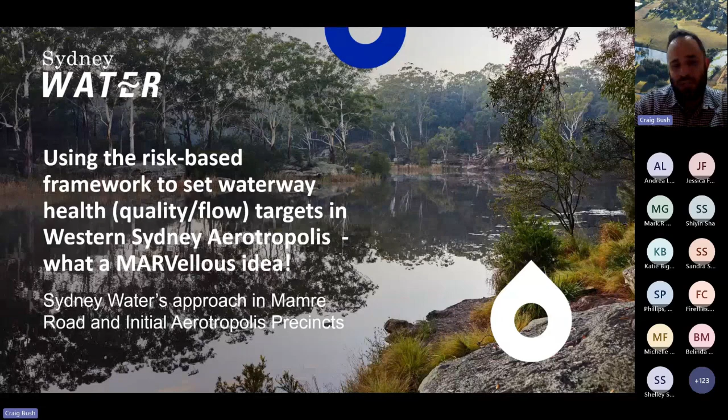G'day everyone, thanks for the introduction. My name is Craig Bush. As indicated, I work for Sydney Water as the acting Wianamatta Stormwater Lead and looking at Mamre Road. So today I'll be talking about how New South Wales and Sydney Water have used this risk-based framework to set the waterway health targets within the new Western Sydney Aerotropolis precinct.

I would also like to acknowledge the custodians of the land and water, and for me it's the Dharug people in Western Sydney. A quick overview of what I'll be talking about today will be the Wianamatta catchment and the Aerotropolis precincts, and what some of the drivers are that have been undertaken to get us to where we are.

What makes this project quite different to some of the others within Western Sydney and New South Wales? What's our integrated water cycle management approach, and the status and way forward from this point?

So a little bit of background. The Wianamatta, or South Creek, is in Western Sydney. It's quite a large catchment, and its actual name in Dharug means mother's place.

It's 80 kilometres long, 62,000 hectares in size, across 6 different council areas. It is transitioning from a farmland or peri-urban landscape into more urban and industrial development. There is already some development within those precincts, but they'll be intensifying in nature going forward as well. So it's a changing place.

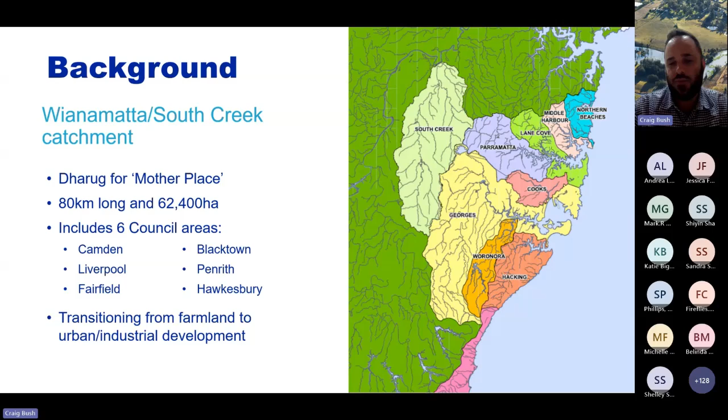In regards to the precinct we're talking about today, the Western Sydney Aerotropolis, this shows a bit of a scale of what it looks like compared to Sydney. It basically runs from the Harbour Bridge or Opera House all the way to the airport, going north-south, and it's quite a sizable area in that context.

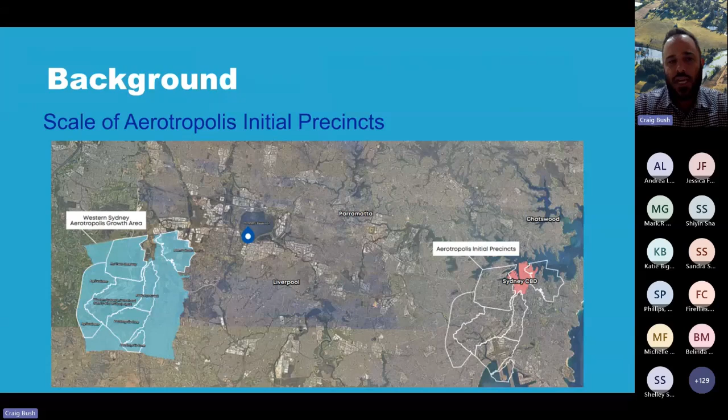A little bit more about the background. Some of the constraints, because it's surrounding an airport and there's noise restrictions, the predominant zoning will be industrial. There are some pockets of residential and mixed use, but predominantly industrial, meaning quite large format buildings that take up a lot of space and produce a lot of stormwater.

Another potential constraint is the airport requirements - they're quite strict around bird strike and minimising habitat for birds. This is difficult in our response because we're building large ponds, which I'll get into later. Also, the Aerotropolis precinct is across multiple council areas, so we need good relationships going forward with that.

But the opportunities are, obviously, it's quite large, the precinct, and the amount of development that's occurring, so it's great to get all that planning done in one go, or as succinctly as possible. The New South Wales government's been great in supporting the waterway health targets and making sure they're set in the DCP and the SEPP, which I'll talk about a bit later.

And obviously, integrated water cycle management, as we probably already know, its effectiveness is great when it's at a larger scale in terms of costs and implementation. As part of this precinct, there's obviously great emphasis on the landscape being landscape-led, and designing with country has been incorporated into those statutory requirements.

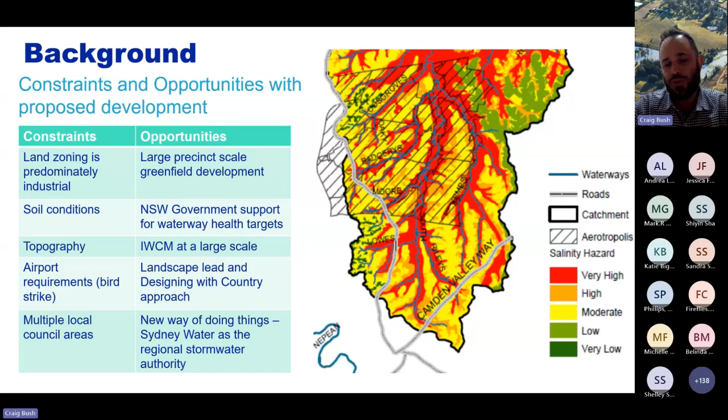And Sydney Water, as mentioned previously, this is the first time at this sort of scale to be looked at as the regional stormwater authority, where we're looking at both the conveyance of stormwater, but also the water quality and reducing flows.

So the drivers for WSUD. The Aerotropolis precinct is quite big to facilitate the airport, and there's going to be some logistic hubs as well within this space, so the most development is in this industrial commercial space.

But there is a bit of a mix within the Aerotropolis, looking at the environmental, which is mainly the riparian corridors. There are some pockets of residential, and agriculture is also being proposed. However, initially, from what we've seen, that's also looking to be somewhat industrial zoning as well, with large format warehouses being proposed. So that is a bit of a constraint we need to consider as we move forward in that process.

The initial precinct is around 7,500 hectares, but there are some future areas coming on board later down the track, which add up to close to 3,500 hectares.

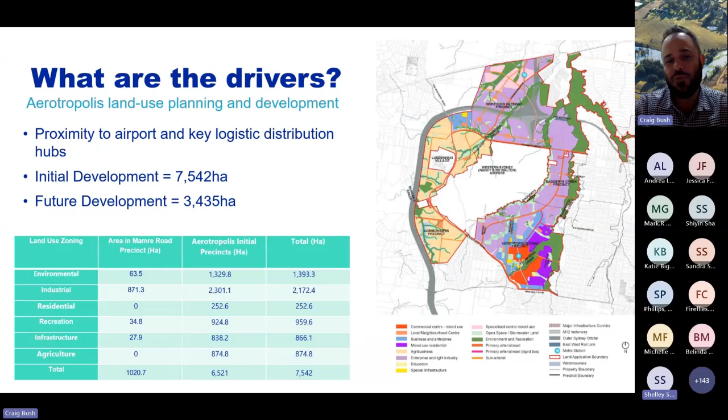So the next driver is the existing environment that's out there. There's some threatened species such as the Cumberland Plain woodland community and the river flat forest, and there's been work to look at which areas we should be protecting and improving to provide a better environment going forward.

And then obviously the Wianamatta South Creek is identified as having high ecological value waterways and water dependent ecosystems, so we need to be wary of how we protect and move forward on that, some of which are sensitive to both pollutants and the flow that's generated, and also the fish habitat.

Sydney Water has also been working with, I think it's Western Sydney University, looking at doing some platypus surveys, and we have found the eDNA in a couple of samples, but we're still yet to actually trap one of the platypus for research purposes to see how it's going. So there is a bit of work happening in that space.

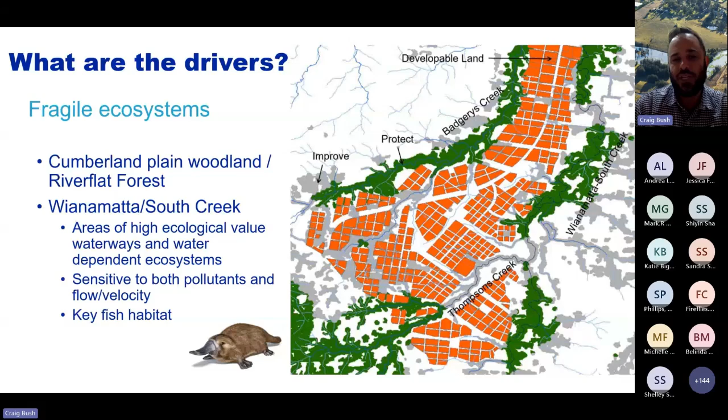Now when you're looking at the policies and strategies, there's a whole raft of them looking at this precinct and Western Sydney in general, so they all play an important part in what drives waterway health protection and the implementation of WSUD. Just looking at the main ones, there's the SEPP, which is the highest level looking down. It provides clear indication that WSUD should be incorporated as part of the development to protect the riparian, stormwater and flooding measures, and it should be integrated.

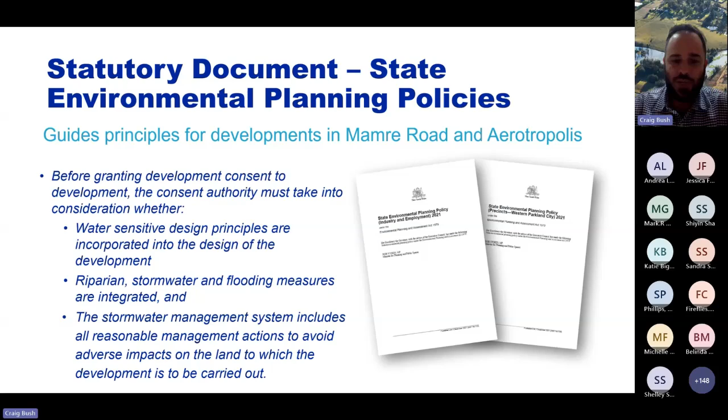And the stormwater management system includes all the reasonable measures to avoid adverse impacts. Then the next level down, which is the DCP, again is quite strong in that it's there to protect, maintain and restore the Wianamatta South Creek and its tributaries from managing the impacts from development, looking at the conveyance of stormwater, and also life cycle, maintenance and effective management of stormwater going forward using WSUD.

So what makes this project different? Obviously within New South Wales we generally look at the fairly standard BAU approach, which is the 85, 65, 45 pollutant reduction targets. But there's been a body of evidence indicating that might not necessarily provide the ecological benefit going forward to protect the waterways, and that we need to be looking at more of a site-specific or waterway-specific approach to identify what we should be looking to protect and how we go about doing that.

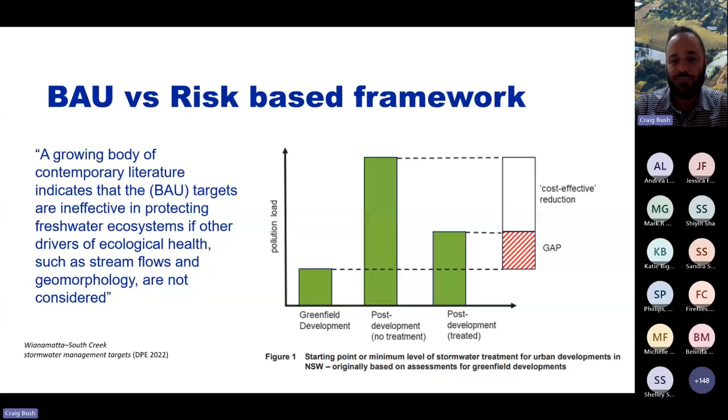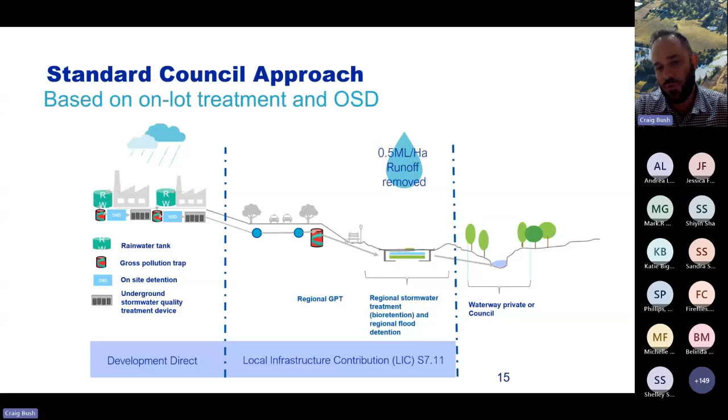So this is an example of what the existing BAU process may look like for an industrial development, where you may have a rainwater tank to meet 80% non-potable water demand, on-site detention and water quality treatment on-site, or potentially on a regional scale. The stormwater generated from those developments and from the streetscape goes into a regional basin where it gets treated to meet those targets, but then the majority of those flows go into the waterway. Very minimal is actually reduced in that approach.

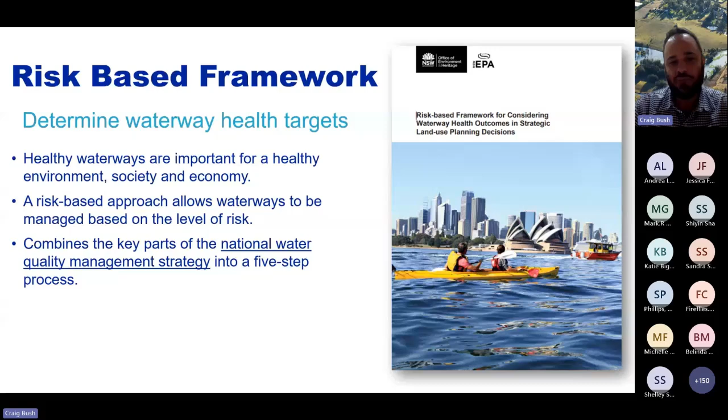But then once state government was looking to create the frameworks around South Creek and Wianamatta, they used this risk-based framework, which is a great document and a great way of looking at how we determine waterway health targets going forward, looking at multiple important components such as the environment, social and economy. It also leans on that national water quality management strategy, which is a five-step process.

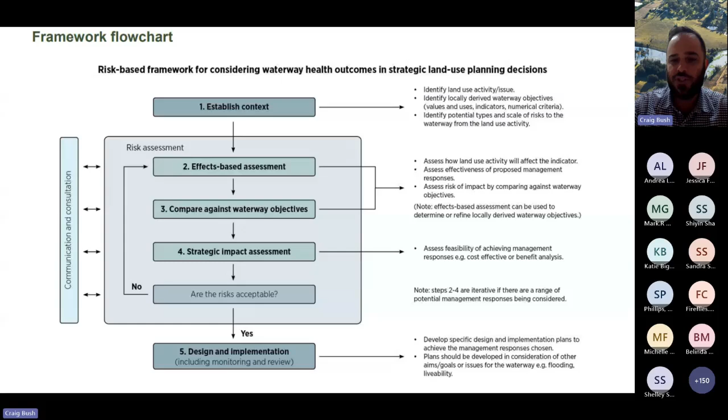I'm not going to go into it in detail, but basically you identify the context, you identify some of the issues and how those impact the objectives. You come up with, and might need to look at, the approach, and then how that can be fed back into a cost-benefit analysis. And if it all works acceptably, then you move through into design and implementation.

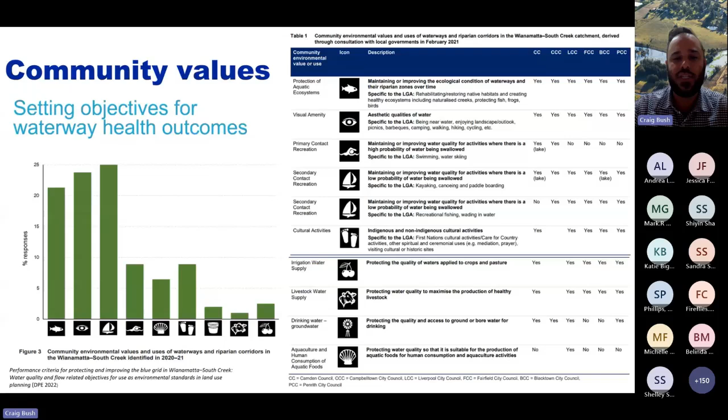With the Wianamatta South Creek catchment, they looked at the community values, a lot of which are focused around that ecological health and some of the secondary contact. There was also some values being placed on primary production and aquaculture going forward, because the Hawkesbury Nepean does have oysters and other key industries in that space, so protecting them is of great value.

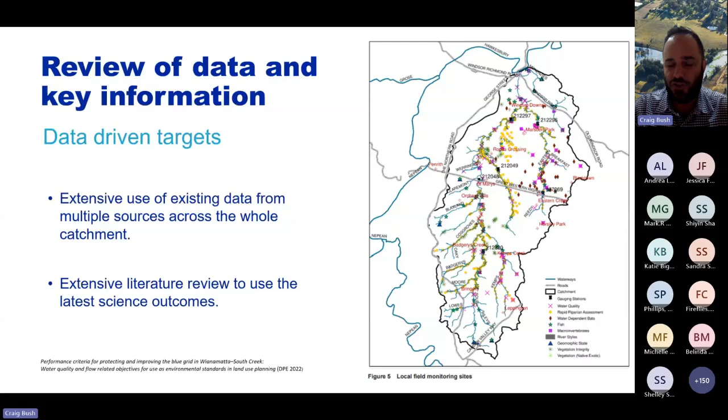As part of that process, there was a lot of data collected within this whole catchment to look at the waterway health and the existing environment, to work backwards and say, well, how do we need to protect it and what are the ways in which we need to go through for that? Also, obviously, looking at extensive literature that's been developed Australia-wide and globally.

And the outcome was that they set up these waterway health targets based on that data, but also determining through the creation of tipping points at what point does that create a negative impact that's irreversible. So how do we avoid that and work out the targets based on protecting that and reducing that impact going forward?

So how's that sort of related back into the DCP, the Development Control Plan requirements for water quality? I've included the standard council 90, 85, 65, 45 reductions, but the Wianamatta targets are a little bit higher for water quality, so it's 90, 85, 65. There's also a second option which is looking at what is the actual allowable mean load.

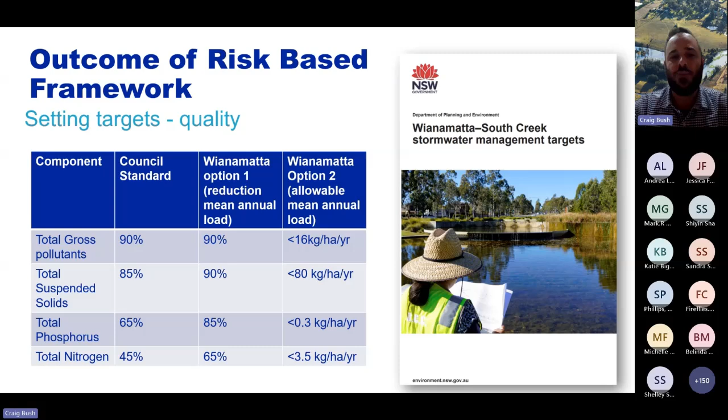So there's two options. You can just do the basic load reduction, or you can work out specifically the amount that's being reduced depending on the type of development, and I think that's mainly for existing development where you're making modifications.

But the big one that's different is that we have a set target looking at flow, which comes from the MARV idea, the mean annual runoff volume. The target being, generically speaking, less than 2 megalitres per hectare per year. Industrial development from our modelling normally lands somewhere between 5 and 6 megalitres a year, so there's a significant reduction in the amount of flow within the waterways to protect them and provide that buffer to make sure we're not getting past the tipping point.

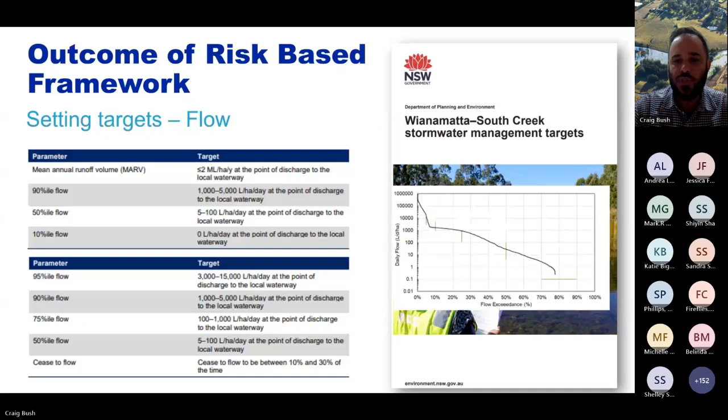Okay, so our approach, similar to what we showed before with the BAU, is that there's still some on-lot controls, mainly the pervious fractions, so landscaped areas. There's still a gross pollutant trap, and still on-site detention, but there will be irrigation of those landscaped areas. One of the main differences is we have the inclusion of passively irrigated street trees within the streetscape.

That's a council requirement, or Transport for New South Wales, depending on the type of road, and they're there to be integrated to take some of those flows from our roads to reduce the volume that ends up getting into our regional system.

We've also got natural trunk drainage channels which convey the water to those end of pipe systems and contain that 1%, and the regional approach being that we treat the water to those standards, have large ponds that then provide water back to a recycled water system that's fed back to the precincts to be used for non-potable water demands, such as toilet flushing and irrigation.

And we've also got a backup from the Advanced Water Recycling Centre, the AWRC, which can provide water for when we're going through drought and there isn't any stormwater to harvest.

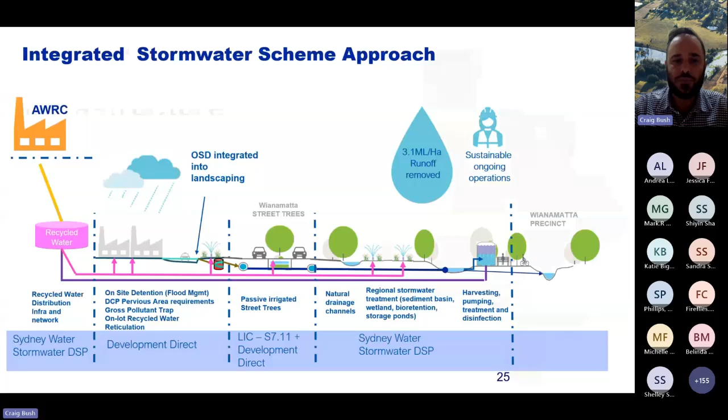So within the scheme, the precincts at the moment, Mamre Road is the first precinct that's going ahead, and we've done some scheme planning as part of that process, shown in this image. Basically it shows our trunk drainage channels and the basins, which are generally on the edge of the precincts. There's roughly 11 kilometres of trunk drainage and 24 basins, which equate to about 65 hectares. So at a regional approach, this is what we need to meet those targets going forward.

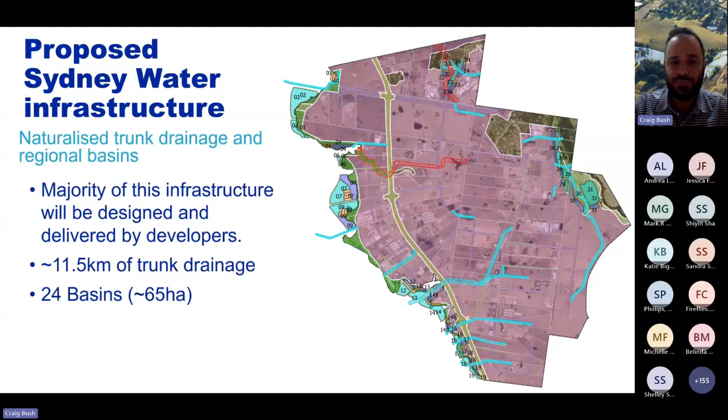Our trunk drainage channels, being a naturalised system, have a low flow channel, and convey that 1%, which is quite important, generally between 20 to 40 metres wide. Sydney Water may not necessarily own the asset, but control it via an easement. It's also quite important in that it provides irrigation water going forward.

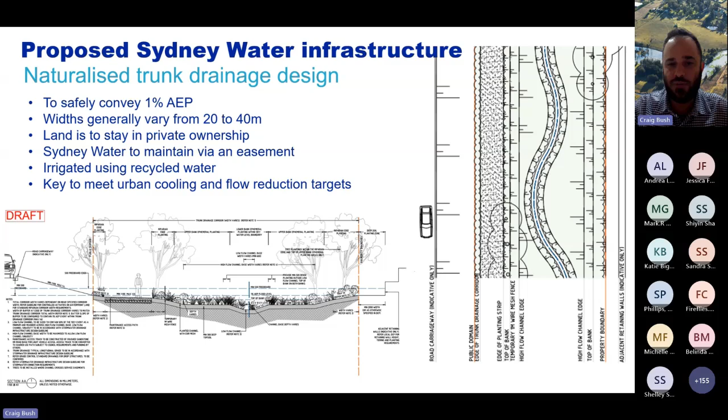So we're helping to achieve the targets through the irrigation of these areas going forward, along with the private development. It's also a key part of making sure these development areas are cool, providing vegetation and cooling through the irrigation, as well as reducing those flows.

Then our regional basins, which again form part of the treatment required to meet the targets, generally consist of a sediment basin being online or offline, wetland and bioretention systems that are coupled. So it means that the wetland, as it fills up, will drain through the bioretention system before it gets into the pond. They share an EDD, so it makes the bioretention work a little bit harder to meet those targets.

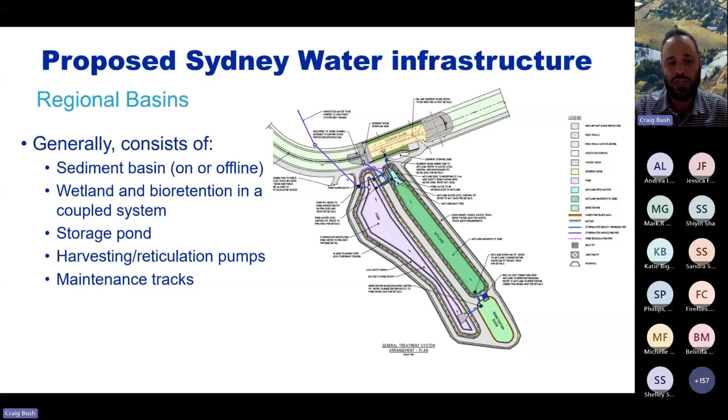And then the storage pond is sized to meet those demands for the recycled water, so they are quite large. Obviously, as part of that, we've got harvesting, reticulation systems, end of pipe treatment—screen filters, chlorination, UV, all the rest of it—and then maintenance tracks to make sure we can maintain these assets going forward.

Once the water gets into the recycled water system, there's a distribution network that follows the road alignments so that all developments have access to this recycled water for their non-potable demands going forward. Generally, harvested stormwater is the priority use, then treated wastewater, with potable water as the last resort.

So, current status and ways to move forward. For Mamre Road, we're the authority, declared in March '22. We've created some scheme plans that have evolved over time, now up to the third scheme plan. We've got some initial indicative approval from Infrastructure New South Wales as part of our final business case. However, that's dependent on IPART, our independent body that reviews these large-scale projects, looking at efficiency, fitness for purpose, and cost allocation. That's still an ongoing process, to be resolved in a couple of weeks.

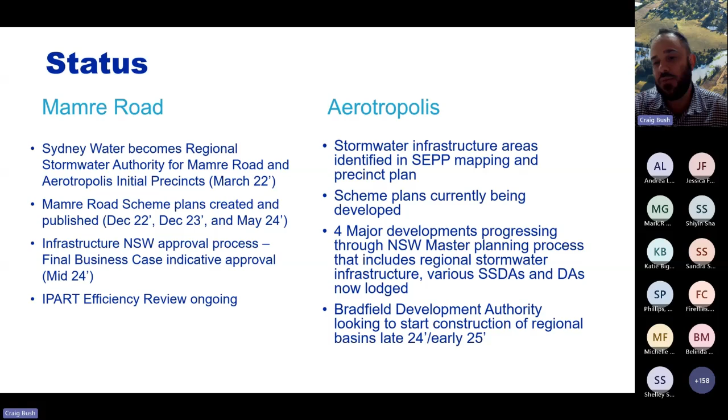For the Aerotropolis, it's a little behind Mamre Road, where we're starting to develop those scheme plans moving forward. But we do have some areas already identified within the SEPP, which protects and locks that land away for the time being. We've also got development occurring through master plan development—these are 100 hectares or greater developments—already starting to design the WSUD and end-of-pipe systems and trunk drainage channels. Bradfield Development Authority is already looking to start construction of some of these assets in the next couple of months.

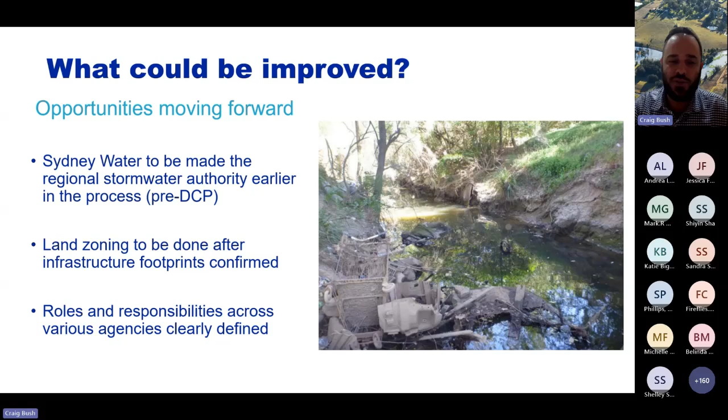What could improve? It would have been great if Sydney Water was made that regional authority a little earlier in the DA or DCP process, so we could better align ourselves with processes and ensure those scheme plans could have been done as part of the DCP and any mapping done. That would have better informed some of the zoning, making sure basins are adequately sized and in the right areas, and clarified roles and responsibilities with councils and other authorities. That's being worked through, but it's complicated because this is the first time at this scale that Sydney Water's doing it—a bit of a learning curve, and we'll get there.

What's next? Finalise the IPART, register our contribution plan, which is the development service plan, complete those Aerotropolis scheme plans, and adopt the lessons learned from Mamre to make that as efficient as possible. And continue to work with the development industry and government to deliver these regional infrastructures effectively.

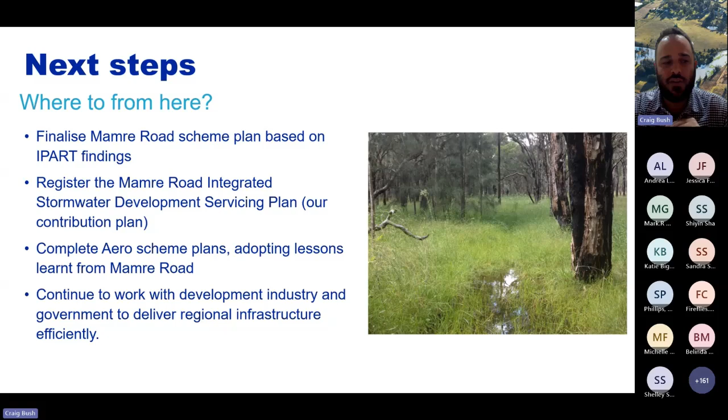The main driver for good WSUD for us within this precinct is mainly around having the instruments within the statutory planning requirements, making sure that as development occurs, both councils and Sydney Water are reviewing it and ensuring it's implemented in a way that provides the benefits needed to protect South Creek, and that we're all working together as efficiently as possible.

Next slide, some contacts and some key referencing material. So yeah, that's it for me.

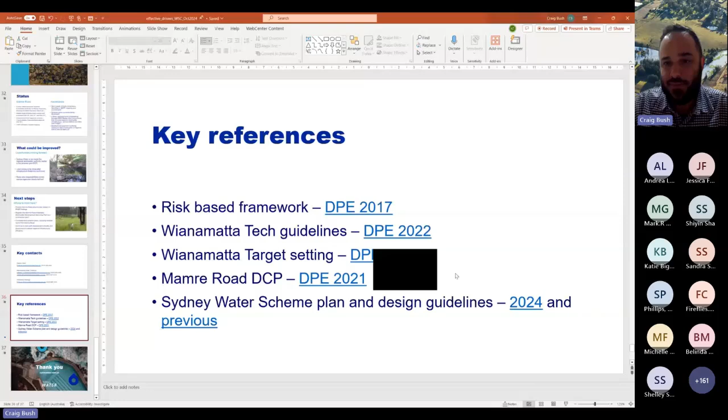You're on mute, Shelley. Sorry, and I left my microphone on before too, so I'm really not doing very well today, am I?

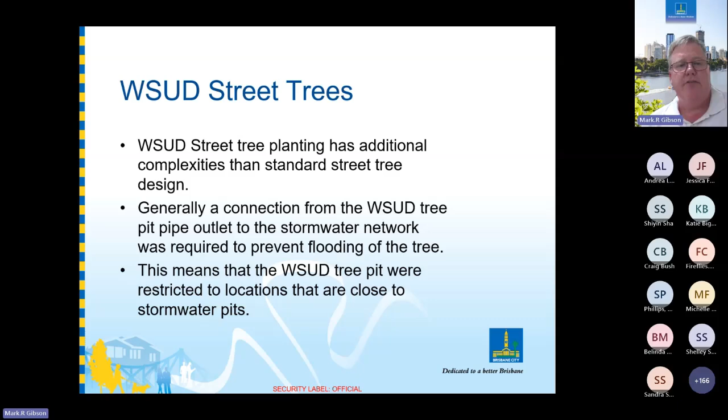Generally, we had to make sure our street trees were connected to an outlet in the stormwater network. And it would mean that any street tree with WSUD connected to it had to be right next to a stormwater pit.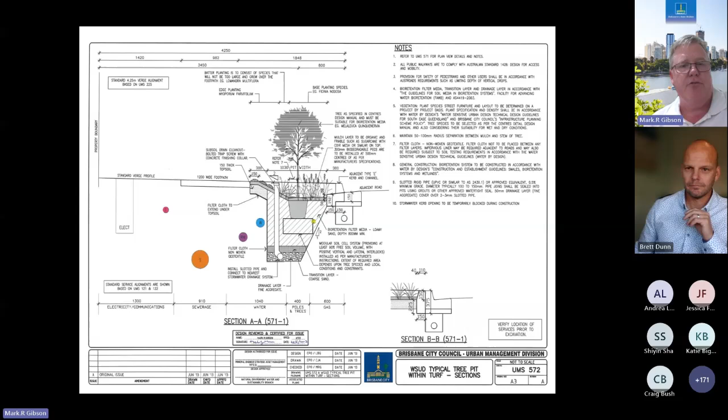Here's an example design from a local council that used this sort of design, rolling out bioretention pits for street trees. Very expensive, somewhere in the order of $5,000 or $6,000 to install, compared to a street tree installation cost at the time of about $100. So 50 times more expensive.

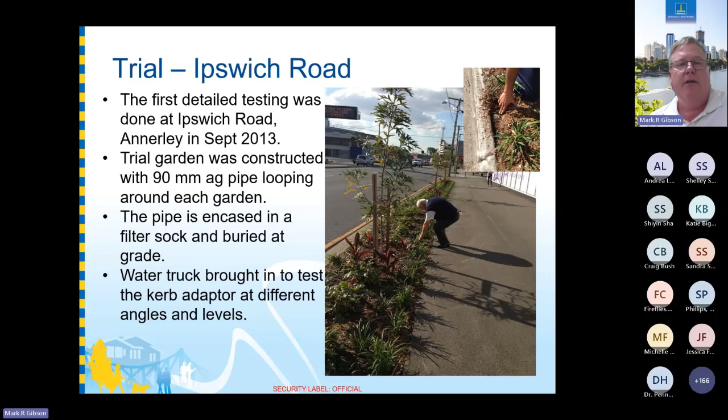The first trial of street trees up in Queensland was done at Ipswich Road in 2013, where essentially a WSUD garden was planted with an ag pipe and an inlet at each end. Here's a schematic of what it looked like. Stormwater would come down the hill, flow in, flow down the ag pipe, and then flow out the other end.

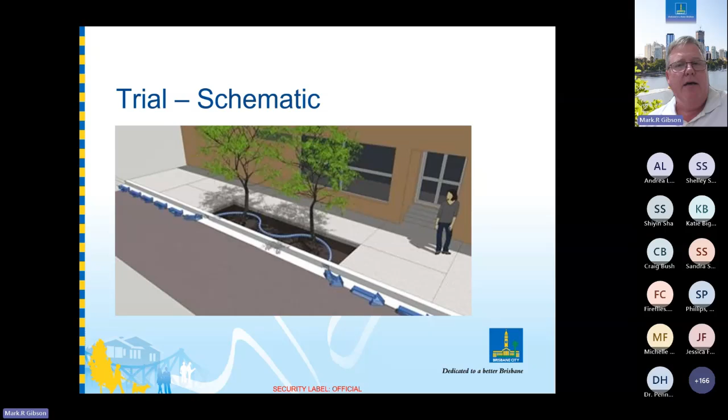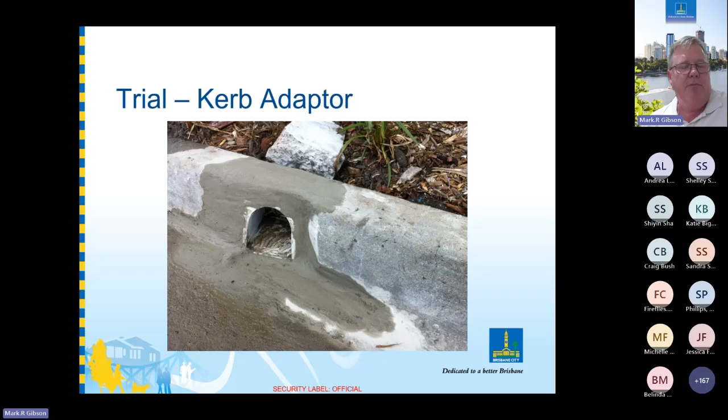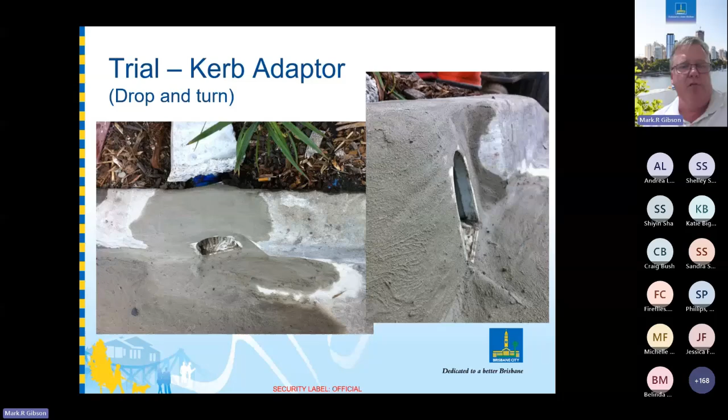At the trial we were essentially testing what it should look like, what type of kerb adaptor we needed. We put in little bumps to try and trap stormwater. We dropped it, here's another example where we'd cut it in and move it around. If we put a small drop, gravity would assist us. And we ended up with these types of inlets initially.

Pretty quickly we realized that doesn't work well, and we've been trialing a number of different types of inlets for street trees since. Here's one that's essentially a mesh type, which has proved successful. But we also have a number of different round inlets that we're using now.

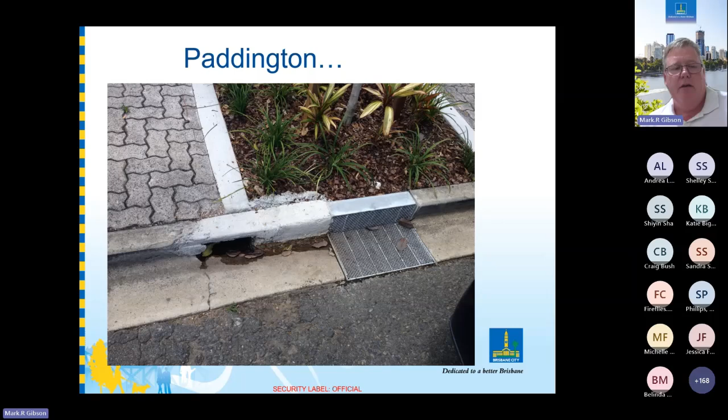Street trees have essentially become commonplace across southeast Queensland and Queensland, and as Craig mentioned, down in Sydney, I can see that they've become a standard part of our WSUD environment. Oh, I think I've gone backwards.

Another part of WSUD that has certainly taken off in the last 10 years is filtration systems. Filtration systems are what they say: at the end of a pipe, we're essentially filtering the water prior to it reaching the creek. We named them creek filtration systems, but it's not really that—it's more a WSUD experience or stormwater filtration system.

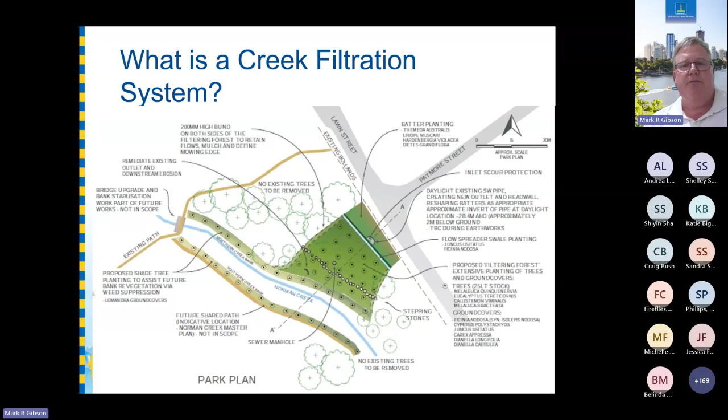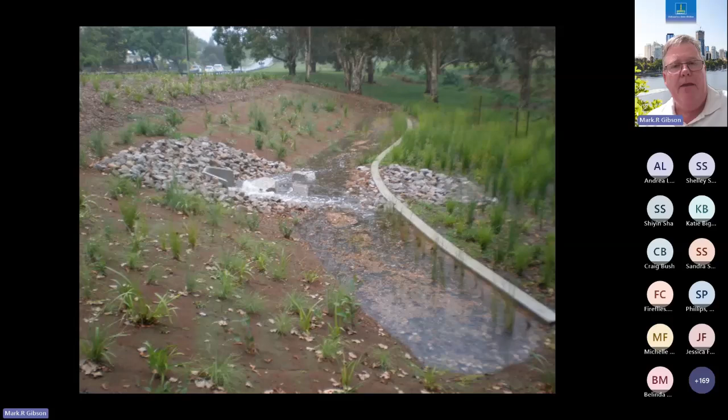Here's an example of the stormwater inundation you'd get across the filter forest, and here's a picture of it in action. Stormwater comes flying down the pipe, gets its energy reduced by boulders, then spills out across a level spreading weir. From there it passes over the weir in a very shallow, low velocity experience, where it can be filtered out—plants remove nutrients, sediment drops out, and even heavy metals can be picked up.

This filtration experience proved to be very successful, and it didn't take long for the plants to take off. They enjoyed the nutrients, and a lot of the nutrients that would have gone into the creek were essentially picked up.

We also trialed an experience like this in a more linear fashion - a plan where stormwater comes out one end and passes down through a linear filter forest. I'll move quickly through this.

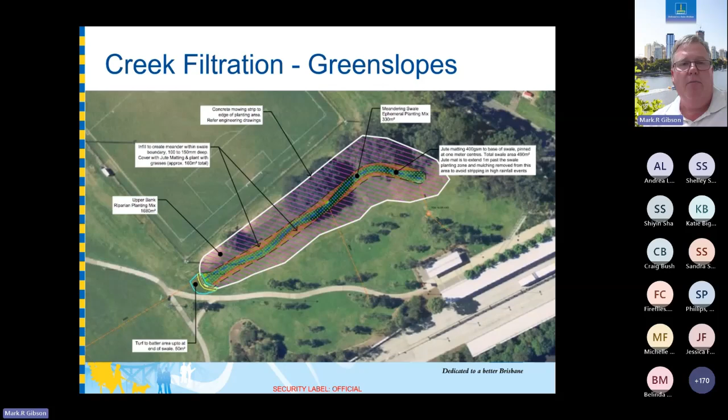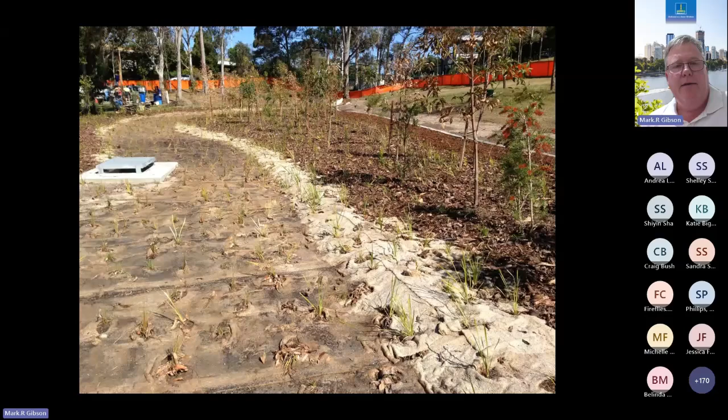Here's a picture of it - you can essentially see the channel in the middle, and we're planting up vegetation. Another view along the longitudinal profile shortly after planting, and here's the outlet. Then we start to see it in operation as it establishes.

Here it is after quite a long time, a couple of years, 2 or 3 years. If you go there now, you can't tell that it's actually a WSUD device - it just looks like bushland. But whenever it rains, the stormwater essentially passes through a filter forest prior to entering the creek.

I'll share one more experience we had, similar to the first one, where we spread and filtered. This one was done at a very large outlet into a creek.

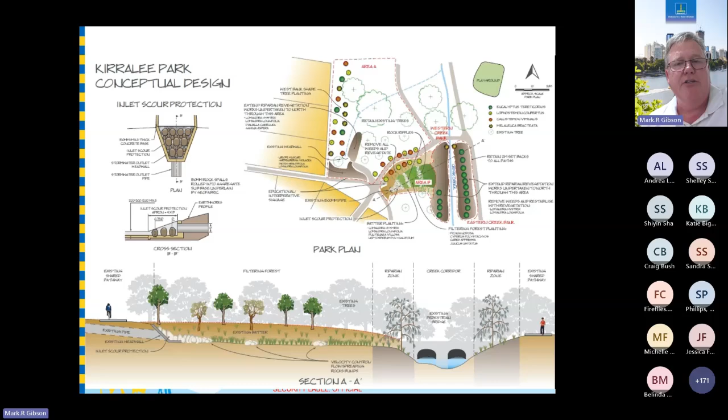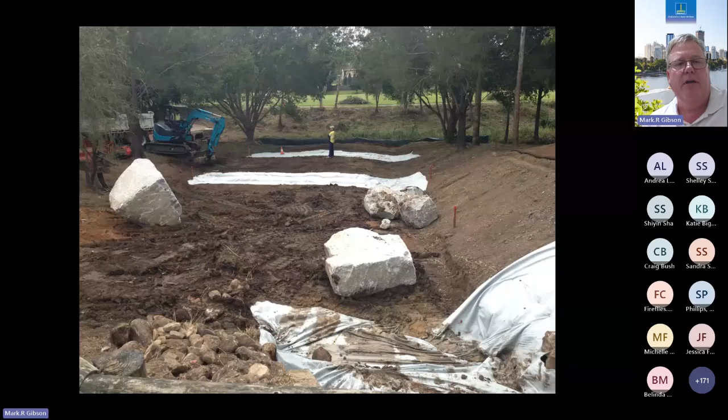I'll show you some construction pictures. This outlet here is much larger, about a 1650, so not the conventional one you'd normally expect. Because of that, we used very large rock boulders to essentially reduce velocities. In the background is the creek.

This is a picture shortly after planting. You can see the large stones, which then moved into a filter forest with a bit more stones, and then prior to it getting into the creek. That's July 2013.

Here it is shortly after, and here we are a year later as things start to grow up. We found this sort of experience to be very successful and an easy way to reduce pollutants entering creeks just by slowing, spreading, and soaking. Here it is two years later - quite cost effective to build, and a good end-of-line solution, which can be difficult to find at times.

For my last focus, I'd like to share a little about one thing taking more and more center stage, which is the rehabilitation of hardened waterways. I'll use this example in Hanlon Park, in Stones Corner, Brisbane.

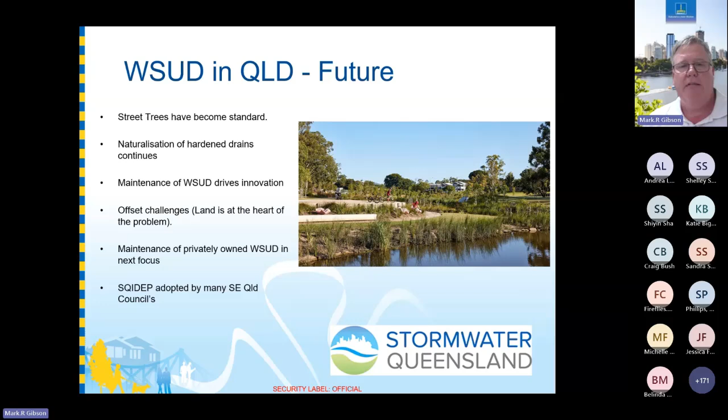Our next focus in Queensland particularly is trying to ensure that privately owned WSUD devices are maintained appropriately. We've also generally across southeast Queensland adopted the SQIDEP certification from Stormwater Australia, and that's slowly becoming more and more widespread across Queensland. Thank you very much for listening, and look forward to any questions you have later on. Thank you.

Fantastic, Mark. Wow, that was so incredible. Thank you to everybody for the reactions, because that's just such a lovely thing to do. The outcomes you've achieved are absolutely beautiful.

Okay, thanks for the invite to talk to you guys today. Shelley and I have been working together in West Australia for a very long time, both on the private enterprise side and the government side, to build capacity in WA's water-sensitive urban design space and integrate it as a normality into planning and policy development, as opposed to just a nice thing to do. It's been a bit of a journey, and if you can't tell by the lack of hair follicles I have, it's been nearly 20 years, and I feel every year of it. Thankfully, Shelley's come out looking okay on the other side, but it's been a harder 20 years on some of us.

Let's talk about how things have evolved here in WA. Before our WSUD days, traditional drainage was pretty much the call here. We're on sandy soils of the Swan Coastal Plain, and the idea was to get that water off the land as quickly as you can. That was done by digging deep drains, putting water into pipes, and sending it down into the rivers, estuaries and the coastline. There was no real thought process with respect to water quality control - it was about getting the water off the land, making sure there were no flood impacts, and lowering the groundwater if possible.

You'll see that bottom right-hand picture - some of our favourite legacy assets in WA. This is where water wasn't considered as part of the planning process; it wasn't designed for. People would go through all their stages of planning, get to subdivision stage and go, hey, what should we do with the water? Let's dig a hole. Not to quote the castle, but not a sensational water-sensitive urban design outcome - it effectively becomes a storage area for shopping trolleys and the occasional dead body. But thankfully, we've for the most part moved on since then.

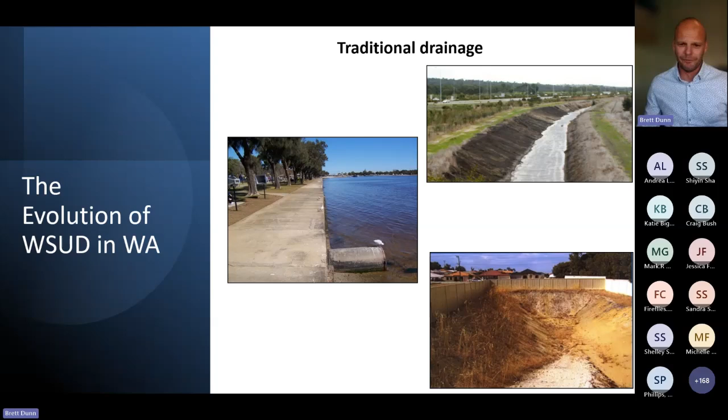We then got into our first WSUD approach, or version 1, which was, well, let's still dig holes and put water everywhere, but let's make them wetlands - which isn't a bad approach in certain circumstances, can certainly work. However, it became a bit of a one-trick pony over here in WA, where developers weren't having to do the strategic planning at the upper levels of the planning process. It was just putting all the water into a corner, saying this corner would stay wet, and they'd plant it out. Some can work, but they'd still have water quality issues, they became a maintenance headache for local governments, and there was the land take associated with that - once an area is permanently wet, its usability obviously isn't very diverse.

So it was a one-stop shop approach to water sensitive urban design - dig a hole, put some plants in it, that's a constructed wetland, which isn't a very holistic way to manage water. Where we try to get to today is a more rational approach - if you're doing good water sensitive urban design, you can't actually tell it's there. That's something we try to achieve, which is almost a double-edged sword, because when you're trying to promote these assets for how they improve water quality, produce usable public open space and attractive space, and mitigate urban heat, people just look at it and go, what, it's a roadside garden, or someone's planted something in the middle of the road - there's a tree with a grate near it, there's some plants over there in the distance. There isn't necessarily that community or industry interpretation of them actually being water sensitive urban design features.

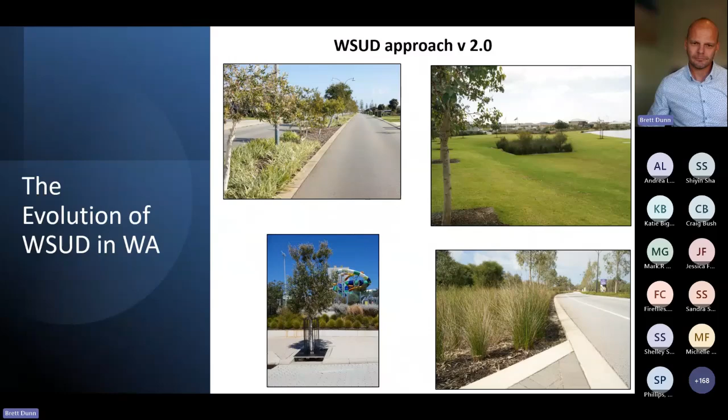So these are our three approaches that we've ended up with. Thankfully, we've evolved pretty much from that starting point. We're not seeing any sumps anymore, and we are essentially between version 1 and 2, but it's a continuous re-education process, and we're going to talk about that a bit.

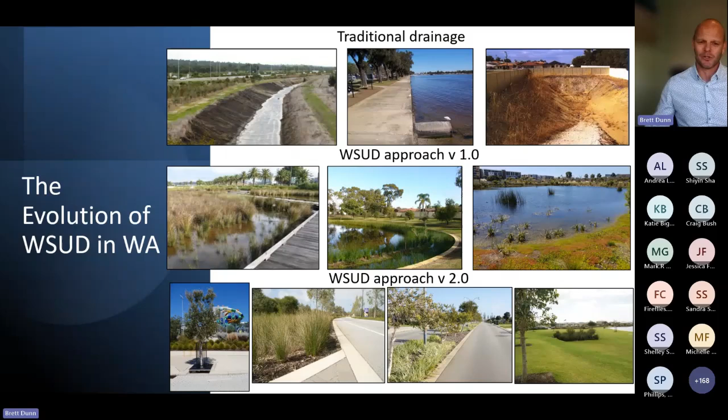The challenge in all this is, in our Swan coastal plain areas, and this area is about 1 million hectares of the catchment of the Peel Harvey Estuary, very typical to these areas, we've developed all the easy land - land that had good clearance to groundwater, had a bit of grade to move the water along, had better soils, didn't have so many interconnected wetlands, and over here you could put a bore into the ground and water would magically come out for free, and that would be your irrigation source.

It's not that easy anymore. All that land has been pretty much developed, and now we're into these more challenging areas where you're going to get more land take for drainage infrastructure. You're going to need more expenditure for filling the land, for creating grade, subsoil drainage, all those kind of things. So it's not as easy to develop in these areas anymore.

That bottom picture is actually a site for a future industrial development of 1,000 hectares. That is typical to the types of sites that we're trying to develop now. All the easy land has previously been built upon.

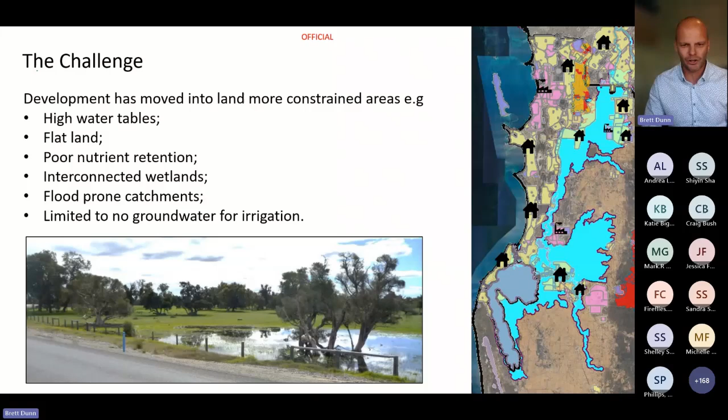This is a look at how development is both existing and proposed into the future. We originally populated the coastal area where we had a bit of clearance. That was fine. But now with those last houses, that is now in wetter areas. These are areas where Perth and Peel are going to be expanding out to a population of 3.5 million, and we've got to put these people in these more marginal areas. So the conversations around water sensitive urban design get tougher because there's going to be more infrastructure outlay and more on cost to developers and less of a profit margin, which becomes a bit of an issue.

So how do we do it? I decided to focus less on the actual physical doing of water sensitive urban design in the infrastructure, and more about the process on how we achieve it. I tried to land on really something catchy in this space, and I ended up coming up with 3 Ps: policy, planning, and people.

And one cannot work without the other at the end of the day. Policy - we're setting expectations that land is to be developed in this way, leading in the future in a water sensitive nature. The planning - you need to embed water sensitive urban design principles at every stage of the planning process if you're going to get anything on the ground. If the structure plan doesn't allow for design aspects, which could be as simple as road reserve widths, if they don't allow for those design aspects at the structure plan stage, you're not going to get them at the subdivision stage. So these conversations and agreement need to be had early on about what the design objectives are to be achieved through the stages of the planning process.

And people need to bring it together at the end of the day. You can have the best policy in the world, best planners in the world, but unless you've got the people to be able to push it, to be able to negotiate, communicate, collaborate, you're not going to get anything off the ground all the time.

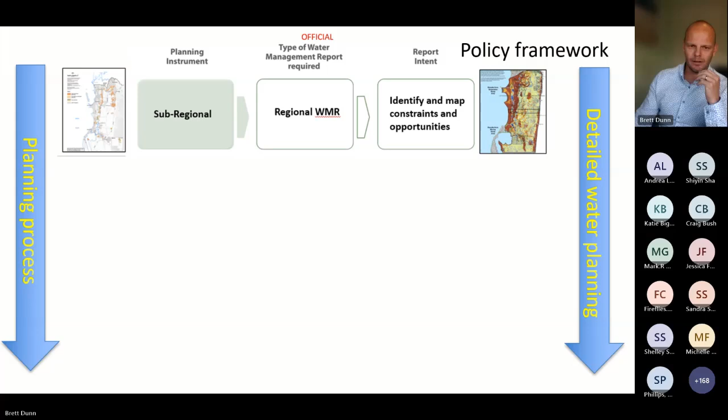At the very first start of planning, government's expectation is that there needs to be a regional water management report which identifies all constraints and opportunities with respect to water and environmental assets to be planned for at future stages. Those future stages then come at the regional scheme amendment or district structure plan stage. This is where we're demonstrating the land's capability to support the change in land use to become urban or industrial land, and it maps out the constraints to that land take. Because that's the big question.

When developers are rezoning land, they want to know, they want to have half an idea of the developable yield. What's the profit margin? What's the business model they're working to for the development of that land? So we need to be able to at least map out that these wetlands are going to stay there, there are these drains or rivers on site, and they need to flow into systems that need to be managed to a certain flow rate. That then dictates a certain volume that needs to be set aside and integrated into your public open space, so that it negates flooding issues.

Onto that then comes the design aspects to those principles. So local structure plans are then supported by a local water management report, which provides the proof of concept on how water is going to be managed in this urban layout. It shows how conceptually those landscapes are going to integrate water into the design, and hopefully achieve outcomes by which we are creating quality space to live in, within our road reserves, residential areas, and public open space. But again, it's done in a way almost by stealth. You can't tell that there's water sensitive urban design implemented. It's just a nice place to live.

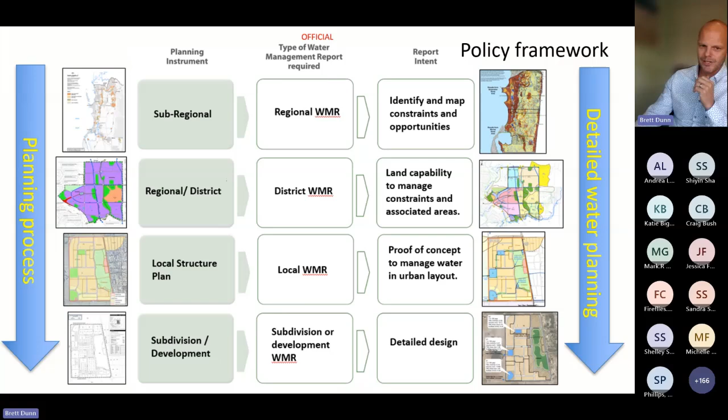So planning is also another important element of achieving WSUD. Now this is basically that policy implementation in process. The policy I was just mentioning, originally Better Urban Water Management, which Shelley Shepherd was instrumental in preparing, is also reflected within our latest state planning policy changes, which are currently with the Minister. So government still retains the position that water in the landscape at every stage of planning is a very important consideration and remains the decision-making basis of planning decisions.

With this process here, we're seeing on the left-hand side of the screen, we're going from district planning where we're mapping out our environmental assets. We've got some wetlands there, we've got the Peel Main Drain as well. Those are the areas we need to be able to link our drainage into in the most appropriate way, and also ensure that appropriate land is set aside.

Moving into the local structure planning stage, then we're starting to see where the water's going to go in certain events, what our design principles are for the minor rainfall events and the major events, where our wetlands and buffers are to also be conserved, and then leading on to subdivision, this is the design that delivers it.

So in this case, it was the Peel Main Drain, an old agricultural drain. You actually see on the bottom right-hand side what it looks like outside of the development area. They created a living stream, a beautiful sense of place, an environmental asset. Again, this speaks to the fact that a water-based property market can be very strong. When it's not necessary, when it was an old agricultural drain there, it then becomes an asset that increases land prices and creates a beautiful place to live.

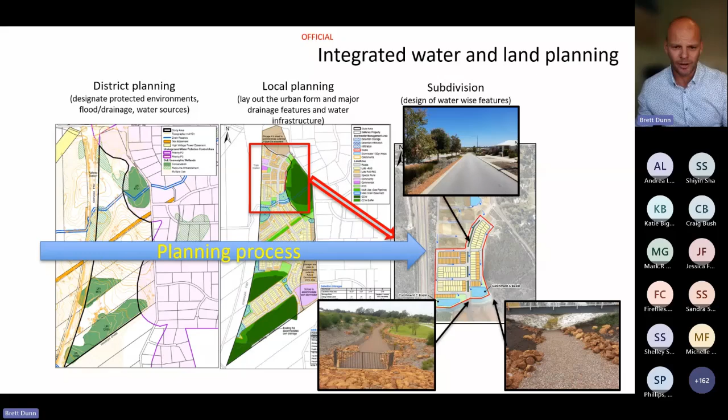So, people bringing it all together. Now this is really, I see this as the really important part, because what policy gives you and what planning gives you is the opportunity to just pass. You can just get by. Look, I just meet the criteria of the policy, so it's okay to go through. It's people that make it better and really deliver top quality water sensitive urban design.

Now, part of that people process is the human touch. You need to be able to sit there and look at a development area and say, well, what are the motivations of the stakeholders who are in this room? State government wants certain things with respect to sustainable development, efficient use of resources, water quality outcomes. Local government have a lot of those same things as well. They also want that open space to be functional, usable, attractive, but also easy to maintain. That's another big thing as well.

We can't sit there and suggest these things be designed, which our local government are going to have to manage at a loss. So there needs to be a rational approach in this space. Developers, obviously, they want their economic margins. They want to be able to market their residential developments as livable neighbourhoods.

Now, that's all really important stuff that we can align collectively our motivations towards, because livable neighbourhoods are ones that are green, leafy, cool, they have quality public open space, they have a great sense and belonging of place. All those things can be delivered with water-sensitive urban design outcomes.

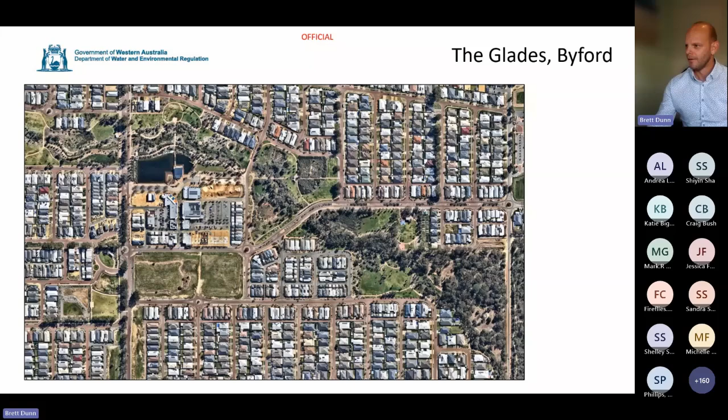I'll finish with a couple of examples. This is a development in Byford in Serpentine Jarrahdale, Western Australia. The tree line is actually a restored agricultural drain flowing through this area. Because it's an agricultural drain that only holds so much flow, we had to ensure enough water was held back that we didn't cause flooding downstream. Those areas became nicely vegetated in this corridor - this was just a sheep paddock, nothing more. It's been a real win to get that urban heat island effect in this area. You can tell as you drive in how different it is to a lot of other development areas.

Now, these are the kind of features within it. We've got flush curbs leading into median swales in a couple of areas, and some living streams set up where subsoil drainage will discharge to - groundwater captured will then discharge to a small man-made creek system, which has really good vegetation growing on it as well as good water quality treatment. Also, because drainage was such an issue here, due to the clay soils and the need to hold back water to ensure we didn't flood downstream development, but also so the public open space didn't always get wet and become unusable, since there was very little capacity to infiltrate.

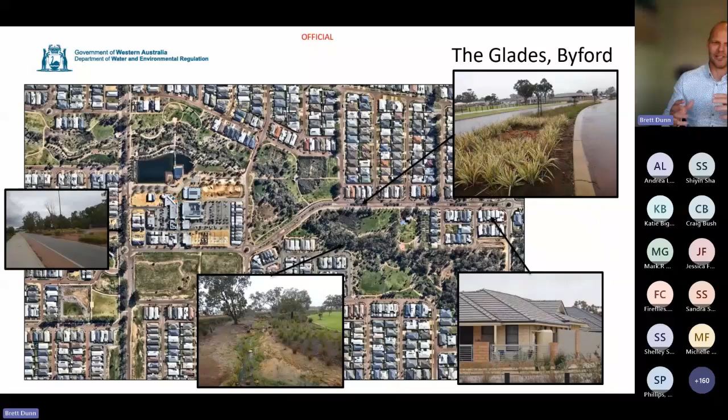The local government, working with us within the planning scheme, managed to mandate the use of rainwater tanks, which hasn't been done in many development cases over here. Those rainwater tanks gave an opportunity for first capture of roof runoff, so it wouldn't find its way into the street system and potentially limit the usability of public open space. So that's the minor flows - a lot of capture within road reserves, a lot of flush curbs onto public open space, dealing with water quality and frequent events. And then your bigger flow events, having controlled discharge to that drain or living stream type system, achieving ecological outcomes and a really good property value outcome. This area is about 40 k's from the coast, an inland farming area, but they've managed to produce quite an attractive water-based property market out there.

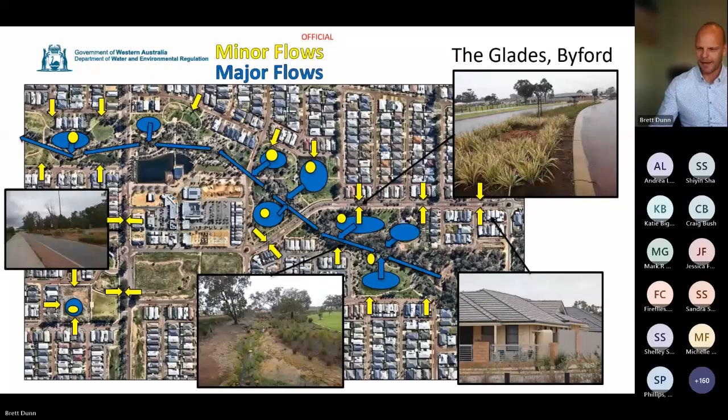Now those big lakes have water quality issues - they have aerators going 24 hours a day, 7 days a week, and they've been a bit of an issue with respect to mozzies and other disease vector type insects. So that's a good polar opposite to what this next development area did.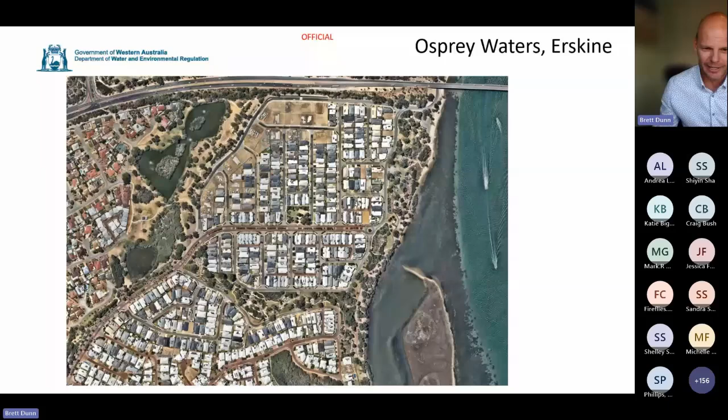So from there, they've gone and really captured water at surface, at source, at any given instance. So they have a living stream corridor running next to the road network, with crossfall all the way across the carriageway into this living stream. It actually holds frogs within it as well — a lovely little setup. They even have a viewing platform for some of the wildlife down there, which has worked very well. And again, it's just a roadside drain, but they've done it very, very well. There's no pipes along that whole section of road network, and in fact hardly any pipes in this whole area.

So in capturing those small events nice and early, it means they haven't had to have these big wet areas or big areas of public open space unnecessarily sized to hold back a whole heap of water. They're dealing with those frequent events high up in the catchment. Those minor flows are hitting bioretention areas, or at least rain gardens in the road reserve. Then in bigger events, they'll eventually discharge out to the Peel Harvey estuary. We've looked after the water quality with those smaller events high in the catchment, so given you have a major estuary system right next to it, in a flooding context there's no problem letting that clean water go in those greater rainfall events.

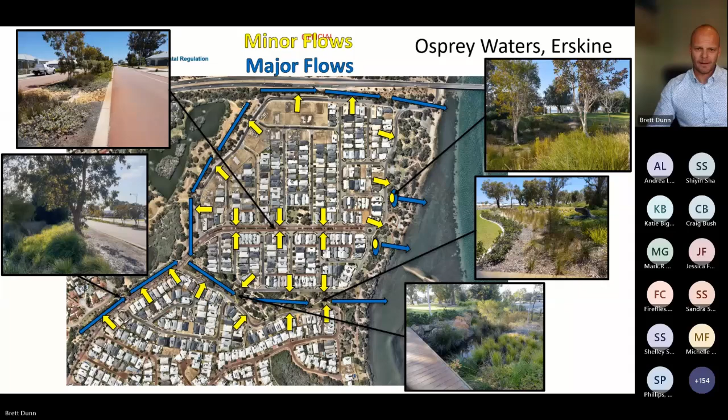Okay, that is me. Thank you very much.

And again, I really appreciate the invite today. I only caught the last bit of Mark's presentation because, like Shelley said, I've got a few things on today, unfortunately. But I really enjoy these kind of forums, and this collective learning is how we really progress in this space. And WA, wait a while — we do have a lot to learn from our Eastern State colleagues as well.

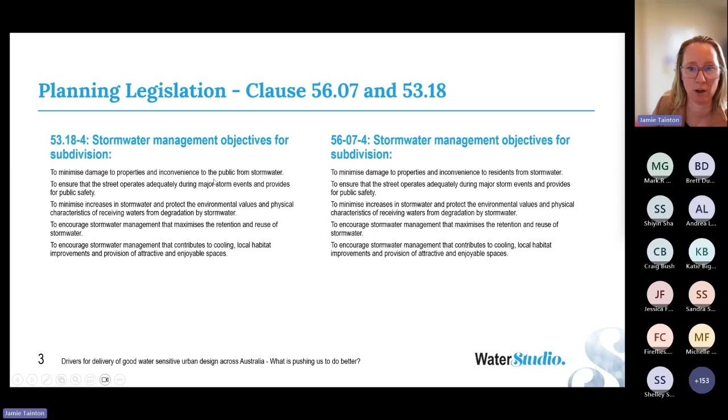Victoria has been running with planning legislation requiring water-sensitive urban design for almost 20 years now. Clause 56 came in 2004-2005, and it covered a requirement for residential subdivision to meet best practice. Best practice in Victoria is 80% suspended solid removal, 45% phosphorus and 45% nitrogen, which differs slightly to New South Wales. More recently, in the last couple of years, we've got clause 53.18, which is basically identical and fills the gaps — where clause 56 covers residential, 53.18 covers commercial, industrial and capital works. So we've basically covered the whole of the state now. Any works require water quality, which is really great.

In terms of how that's evolved and developed over time, Melbourne Water have been leading the charge within their jurisdiction to create drainage schemes. Drainage schemes started off with stormwater quality offsets and got to the point where we have these schemes set up. Now Melbourne Water has over 250 of these schemes — that's a lot to run. They have both a hydraulic and a water quality function, and you will pay a different amount for each, with each scheme having a different value.

Effectively, they work out the catchment, work out what assets they need, and divide it through by the net developable area, and developers then pay that charge. They will actually build the assets within their development parcel. For example, parcel 82 here, they would have to build their wetland, and the offsets they'd have to pay would be offset against the cost of that construction. Then Melbourne Water would sit down and work out the terms of how that might work.

So we've had drainage schemes in Victoria long before we had water quality in them, and now almost all of them have a water quality component. If not, it's on its way.

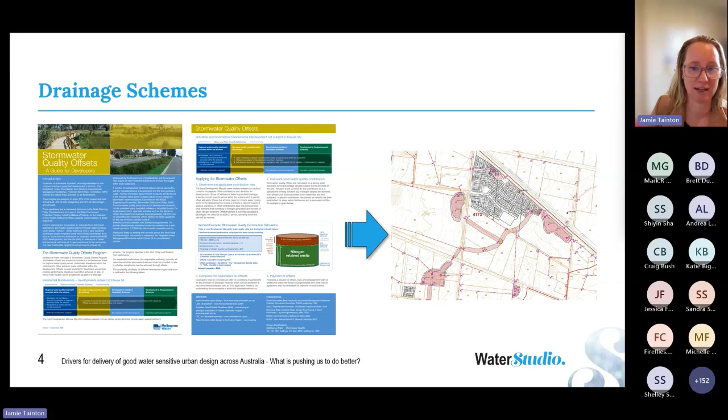Now, this governs the Melbourne Water development greenfields area of Melbourne more than anything else, and a lot of the initiatives I'll go through are probably Melbourne Water based initiatives, but I'll also talk about what happens outside of greenfields and how we get water sensitive urban design in areas that aren't purely greenfields development.

So Melbourne Water put together the Living Rivers program. This has been going for probably almost 20 years, and it's now called the Incentives Program, rolling a couple of elements into it. But effectively it started out as a capacity building setup where they had officers that would go over to councils and say, 'Hi, how are you going? Have you heard of a rain garden? This is what you should be doing and how we can get involved.'

So they put together these officers that went out, but also they funded some of the designs. They also did matched funding, and sometimes they actually built all of the entire assets. Sometimes they actually paid to put urban design officers inside a particular council that really needed it.

The example to the right there is basically just putting some rain gardens or tree pits within car parking, in a project I was part of many years ago. I think we had 3 or 4 trees in 75 that needed to be replaced. In talking with everybody there, that 3 or 4 trees was such a small amount. So the amount of water being delivered to them really showcased how important it was for water sensitive urban design in these catchments.

There's been a few iterations of this program. It used to be Melbourne Water Officer and council engagement. Then it went to funding rounds and requests. Then it was called the Incentives Program, and it went through these funding rounds and requests. Now it's just an open program where you can request funding from Melbourne Water for projects, and they will negotiate with you whether they pay for someone like me to come out and design it, or they may pay for matched funding for the construction of the assets. It really comes down to what benefit it has to the local waterway and how that might be engaged.

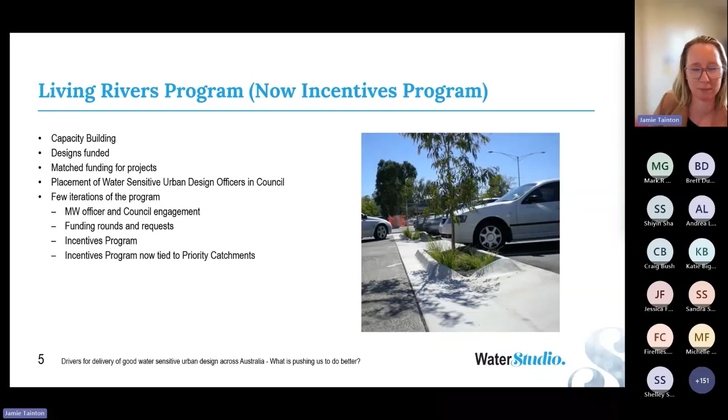Now, the program is tied to what's called our priority catchments. Melbourne Water have worked out where the priority catchments are and where the best bang for their buck essentially is. I'll go into that in a couple of minutes. But now, if you don't have a project within a priority catchment, Melbourne Water's funding programs are a bit more limited.

Another program that ran between 2008 and 2013 was really, I think, fundamental for building the profile of rain gardens in Victoria. Keisha Milenkovic was the face of it for Melbourne. She's now based up at Blacktown City Council and has been for a number of years. But that program basically created an opportunity to showcase rain gardens across the state and in projects, in public houses, in private houses, and in the public realm.

Now, this program became probably too successful, to the point that whenever we talked about water sensitive urban design, everyone went, 'oh yes, a rain garden.'

Water sensitive urban design covers so much more than rain gardens. We're still following the legacy of the 10,000 Rain Gardens program, where you go talk to a council and they say, yep, we need a rain garden. I'm like, do you really need a rain garden? Is that really what we need for this? So we're trying to backpedal out of that a little and showcase that there are many options for water sensitive urban design.

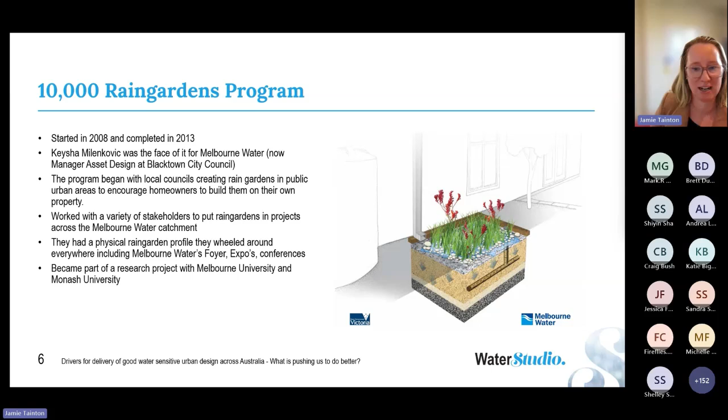To pick up on that, universities also followed on and did research to justify where things are. We ended up with the FAWB spec, if anybody has heard of that - it's a facility for advanced water biofiltration, and it really set the specification for what we use as filter media in that space.

Another newer program we've got in Victoria is Greater Western Water's Integrated Water Management Plan expectations. The real driver for this was the fact that we didn't have a great potable supply to the Greater Western Water area of Melbourne - that's inner city Melbourne and out to the west and a bit to the north. It used to be City West Water and Western Water, and now it's Greater Western Water, all one.

Because they had this lack of ability to supply potable water at the levels they'd want to, they needed to find a way to offset as much potable supply as possible with a variety of things. So they created this requirement for integrated water management plans. Any developer in that sector, over and above the drainage schemes by Melbourne Water, has to provide an integrated water management plan.

What's fallen out from that is basically any lot over 300 square meters has to have a rainwater tank or an alternative water supply, and every dwelling needs to have a passively irrigated street tree out the front. Council and Greater Western Water have partnered on this program and it seems very successful. There's a passively irrigated street tree out the front of every dwelling, and if there's not enough space, they're putting them on side boundaries - so the average is one per dwelling.

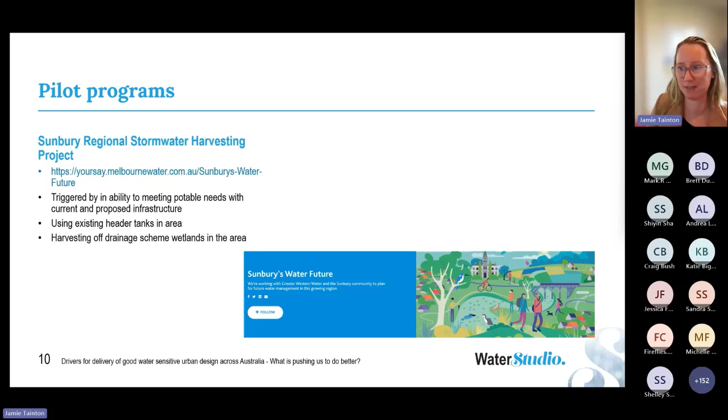And how have we got to this point? I'd be remiss in not saying that we wouldn't be at this point without Melbourne Water. They're the caretakers of the waterways in Victoria, so it really is their remit, as my understanding, to protect the waterways. They've been really pushing all of these initiatives for many years. DEECA, our environment government body, have been at the back end of it, but Melbourne Water is the front end that's been pushing this forward.

Now, I did say that the Healthy Waterway Strategy doesn't have any teeth at the moment. Where it's probably falling out is the EPA, in the last 2 years, created what's called the GED, a General Environmental Duty, which is an overarching piece of legislation that actually gives the EPA teeth in Victoria that it never had before. In that space, we can look at those requirements for the Healthy Waterways Strategy, because the GED basically says do no harm. So if you know there's a better way of doing things to protect the waterway and you proceed anyway, you can be fined and go through court proceedings associated with the EPA. So the GED is starting to be used from a stormwater perspective, which is going to be really interesting to see how that plays out.

Interestingly, councils play a part in all of this too. While Melbourne Water are providing these drainage schemes and pushing these opportunities, council are actually the ones that enforce those planning scheme clauses. So they're the ones that decide whether or not the initiatives you're putting forward in a development are actually in line with the planning clauses, and they need to have confidence with all of the proposed work too. Now, drainage schemes - they're part of the team that put that together, so they know where it is. But if you want to vary from the drainage scheme, which no one really does, and we try not to, then council are the ones that really have to own it and make sure they're on board.

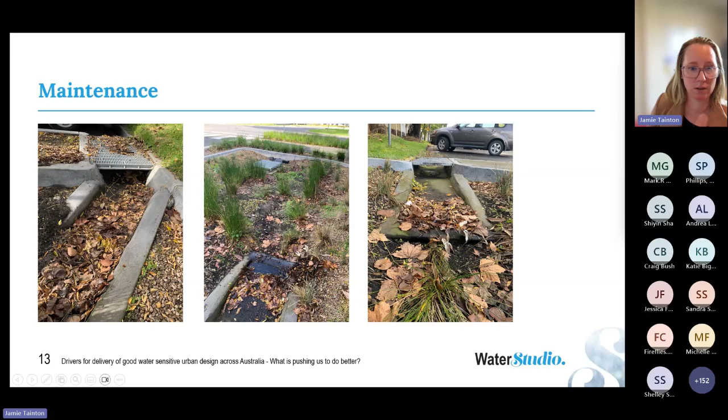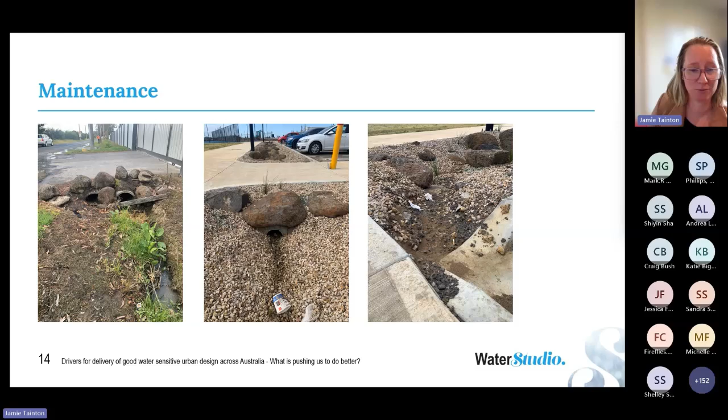We can also go up to that next level, that if we don't continually maintain these things, our pipes and inverts to these systems eventually block, and we've got no water coming into them. So we really need to apply that maintenance side of things.

You can see each of them have got a strong sediment build-up, particularly in our greenfields, when we have that establishment phase, the build-out phase of the houses just smashes these assets. So we need a better way of looking after them as well.

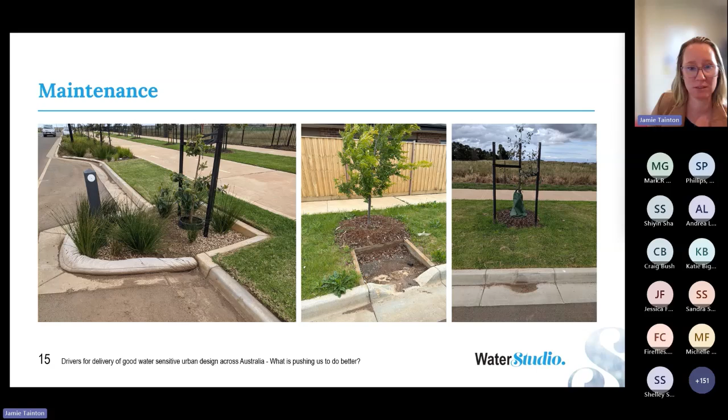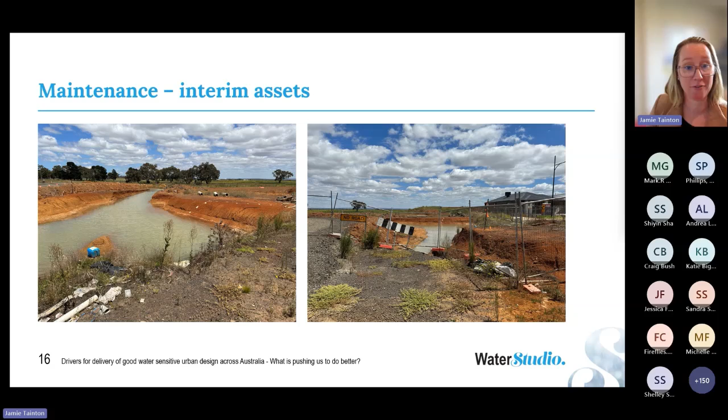So maintenance for me is my biggest bugbear with putting any of these assets together. I really want us to, as I said, we've got great legislation in Victoria that enforces water quality across the board. But what we don't have is a way to maintain them and a way to fund the maintenance of them. And for me, that's a real problem.

And most of all, we need to be in it for the long term. We need to understand the maintenance implications of what we're putting in. We need to allow for that maintenance to be a full reset. None of these assets are set and forget. None of them. We're putting too much water through them. They're high intense for the area that they're treating.

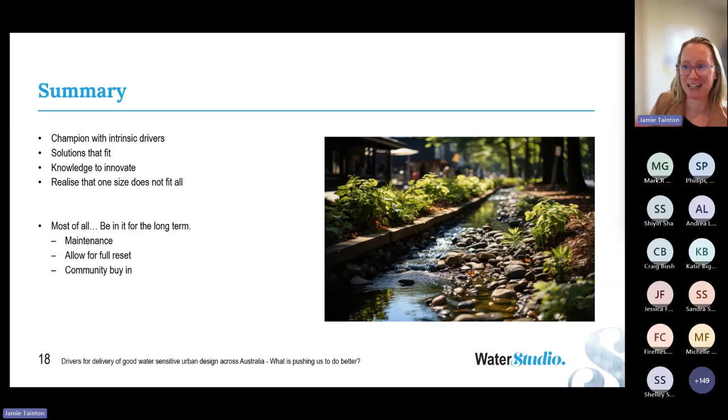And most of all, we need community buy-in. We need the people that are around this space to understand the purpose of what they are and understand that they need to help look after them, to identify if there's problems with them, to engage with the space, to walk in and around them and be part of it. So I know we're running a little bit behind time, so I'm going to finish up there because that's the end of my presentation anyway. But for me, it's all about maintenance. It's all about making sure that we can get these assets in. We need to look after them.